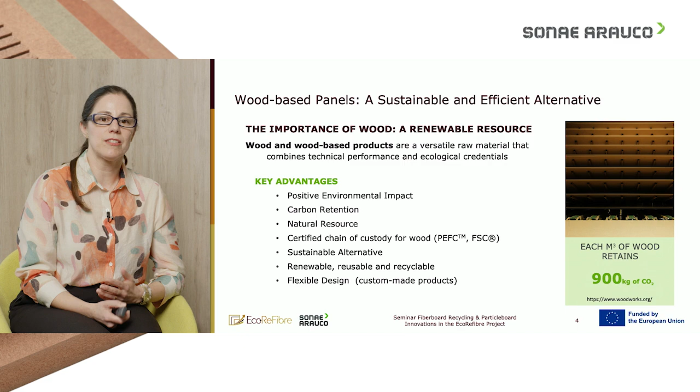Also, an economy based on wood exploitation and forest exploitation means that we need to use certified chain of custody wood, meaning that the wood is regulated and we don't compromise the ecological balance, and also we will always have material available and will not compromise future generations. And this is the most important principle of circular economy. Wood is a sustainable alternative to other fossil-based materials. It's renewable, it's reusable, it's recyclable, so all aligned with circular economy. And particularly for engineered wood products, we can easily tune the products to have different dimensions, different properties. So this flexibility in design turns this type of products very, very attractive to be explored.

And forests play a crucial role in mitigating climate change by acting as carbon sinks. And each year, the European forests retain 806 million tons of carbon dioxide, which is equivalent to 20% of the European Union fossil fuel emissions. So, in addition to this capacity for absorbing CO2, forests also help regulate the climate, protect against natural disasters, and are also vital to maintain biodiversity. So here we can see the importance of the forests and of a bioeconomy based on forest exploitation.

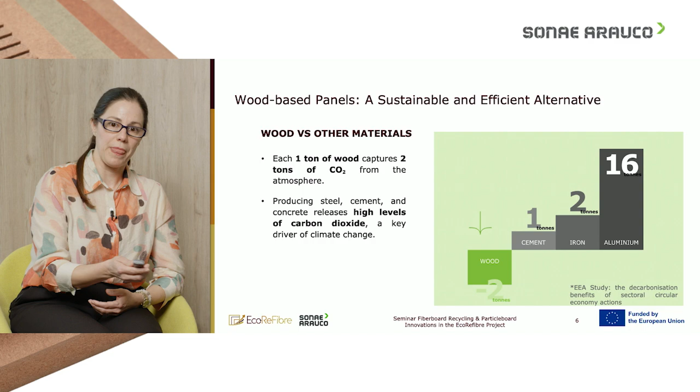Yeah. And as Ines was explaining, wood versus the other materials, so this benefit that wood can bring to our planet is not only this carbon sink, but also this positive impact compared to other products used in the market, like cement or iron or aluminium.

So not only does wood not have emissions in production, making the wood-based panel has a positive impact; it can capture the CO2 also from the other materials. So it also brings this positive impact to our planet, acting like a carbon sink for the CO2.

And it can also bring other advantages when we speak about wood and the circular economy, and that is the main focus that brings us to these projects, that is closing the loop. It's something very important to our industry, not having the products ending with the consumer, and really closing the loop and bringing second life to the products. The reuse and recycling of wood-based products is very important for the planet, it's very important for our industry.

It's the way we have to extend the product life and to bring these benefits for the longest time possible, having the minimum waste of the wood-based products. This also links to the way the products are designed. So eco-design also plays an important role in this step. Even for the recycling of the products, eco-design is very important in the way we can then treat the products and sort out the materials to the recycling centers. So eco-design is also very important.

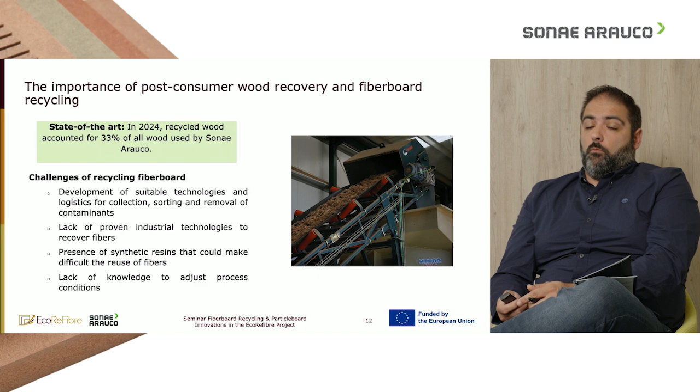And why is this needed? Well, at this time, the production of MDF is increasing. It's a good sign; wood-based products have higher demand at this moment. But that also brings more material being wasted. So we need to recover this MDF that is being discarded to landfills and energy recovery, put it into new products, and try to extend this life cycle. So sorting and recycling technologies for MDF are very important and very needed for our industry.

And André, that is why the project EcoReFibre was born, because, through the figures that you showed us today, fiberboard post-consumer waste is growing exponentially, and there is still a lack of industrially proven technologies to recycle fiberboard back into fibers to be incorporated into the same or similar products, maintaining the value of the fibers. Not using it for energy. Of course, as you said, we need to produce energy, but it's important to keep the carbon retained and maintain the value of the fibers.

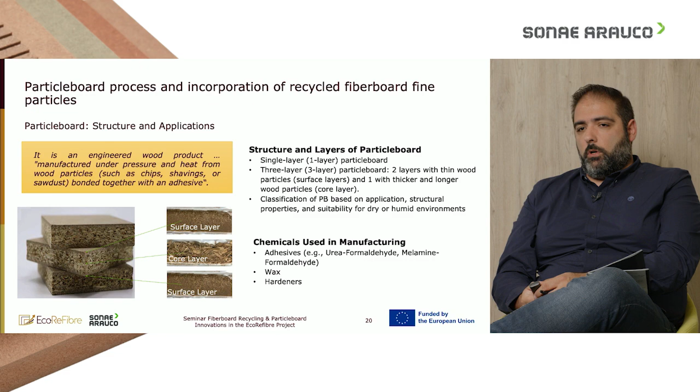Particleboards can be classified in Europe as P1, P2 until P7, the standard from the European Union. And these can change depending on the type of wood that we use, type of particles, and also the formulation that we have in the process. To make this product with wood, we use adhesives, normally urea formaldehyde resins or melamine urea formaldehyde resins, depending on the type of application, emulsions, and hardeners in the formulation, gluing the particles together. The change and the mixture between all of these can give different properties on the finished product, depending on the application that we need to focus on.

And this because particleboards can be used in the furniture that we have in our houses, like cabinets or shelves or our beds or tables. For interior design, wall panelings and decorative uses for construction or industry applications, but also for decorative panels. When we put paper or foil faces on both faces of the particleboard, we can use different types of decors and finishings with veneers or laminates or even lacquer.

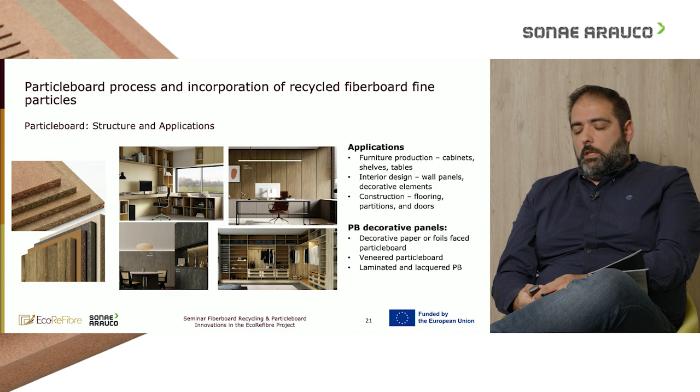So these different applications will lead us to different ways we need to produce the particleboard, and in production, with the different processes that can influence the board, we can have different properties. And how is the particleboard made? We start with the raw material.

And this is a very important step for our products, because it is when we guarantee that we have quality raw material, that we guarantee the quality of our finished boards. It's like cooking at our houses. If we use good ingredients, for sure we can have a good dish at the end. In our products it's the same. So this control of the raw material is very important.

When we use recycled material, the importance is even higher because the variability that we can have in the raw material is higher. So this control, guaranteeing that we only pass wood into the process, is a very important step when we use recycled material. The sorting and cleaning of the wood that we receive from our collection centers is very important to guarantee that it is in perfect condition.

After having this sorting guaranteed and controlled, we move on to the drying and classification of these particles. As I explained before, the particle board can be produced with thin particles and thicker particles, so we need to segregate them and separate them to different parts of the process. This is a very important process to have the characterization of the product at the end.

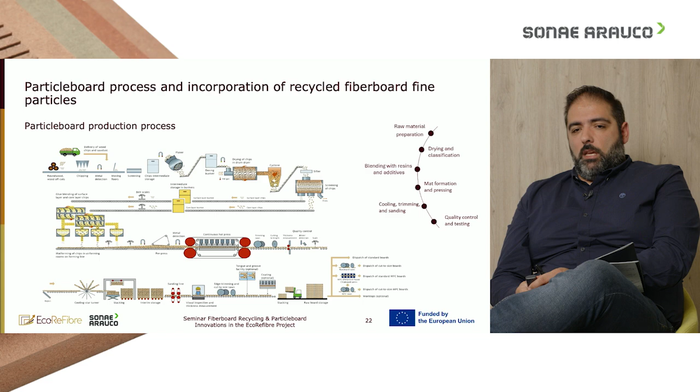After this, we can control some properties of the product, but very few, more related to the surface, appearance and dimension. So we cut the product. We can have different finishings on the surface, different sandings depending on the application of the product. Then there's the packaging and expedition, and our quality control to guarantee that everything we have done in the process was in accordance with what was intended.

And to address one question, the shortage of sawdust. Typically, nowadays sawdust is used in the surface layer to improve surface properties, but due to fluctuations in price and sometimes shortage of this raw material, it's important to find other alternatives that could bring the same benefit as sawdust. So therefore, in this work, the expected benefit of introducing these fines.

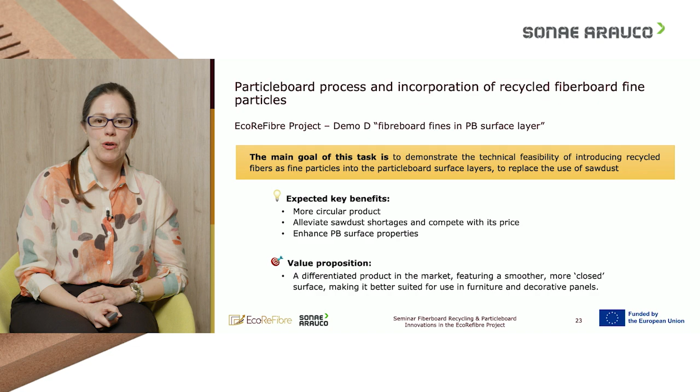And how are these fines produced? They are produced by innovative technology that is being developed by Diefenbacher. So the post-consumer fiberboards are collected, chipped, cleaned, sorted, in order to have a rich fraction of fiberboard chips, and then through innovative technology that we call a dry impact reactor, which is a dry process, the fiberboard chips are converted into fine particles.

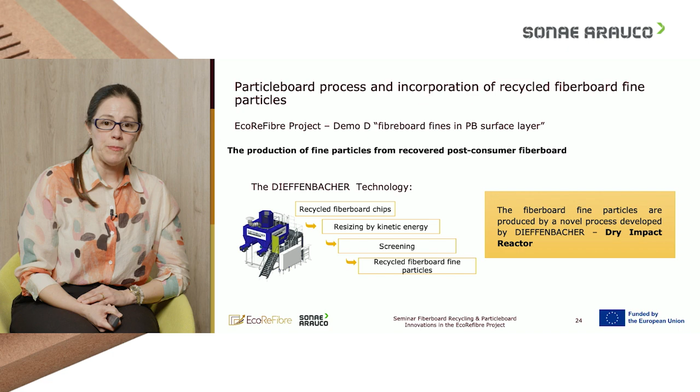And these fine particles are afterwards screened in order to obtain a homogeneous distribution of particles, and this will help us to control the process in the next steps. And so we take these particles to be incorporated into particle board. But first, one of the first things that we did in the lab was to conduct a granulometric distribution of the fines that we were producing and compare it with our typical industrial surface layer particles and also sawdust.

So in the graphic you can see in orange and green two of the batches that were produced by Diefenbacher's technology, so two different batches of fines. And in gray and in black we can see our comparison sources, which are the surface layer particles and sawdust. And the main observation that pops out from this evaluation is that the recycled fine particles that we are producing in the project have a considerable amount of particles below 0.5 millimeters, so very small particles.

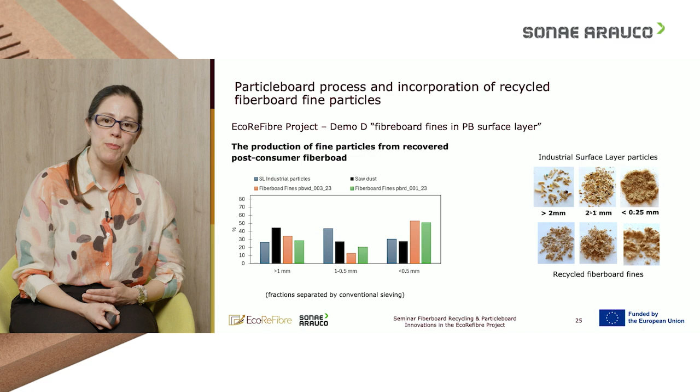And also on the right side, we are displaying the typical industrial surface layer particles that we have in particleboard, and below we have the recycled fiberboard fines that we are producing. So we can visually see that the particles that we are producing have a granulometric aspect and also geometry different from the typical particles that we employ industrially.

So we took these fines and produced particle boards in the lab, 3-layer particle boards. We maintained the core layer standards, and we only replaced 10, 20 or 30% of the surface layer industrial particles by these fines. So we did not add these fines on top of the surface layer. We removed 10, 20 and 30% of the surface layer industrial particles and replaced them by the fine particles produced in the project. And then we blend the particles, glue with our standard recipe and produce the laboratory panels.

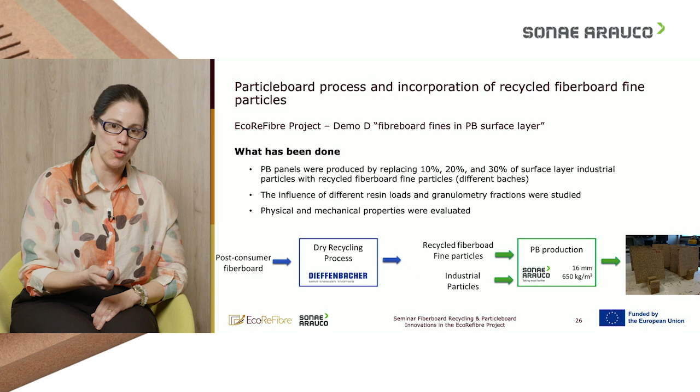In the lab, we studied the influence of the resin load, and also played a little bit with different granulometric fractions to evaluate the effects. For all boards produced, we evaluated physical and mechanical properties to understand the main outcomes of the incorporation of these fines into particle board. And so here first we present the results regarding internal bond at the left, and at the right the thickness swelling of the particle boards produced. We always produced a reference with no fines, 0% incorporation of recycled fines, and then we have the incorporation of 10, 20 and 30% recycled fines.

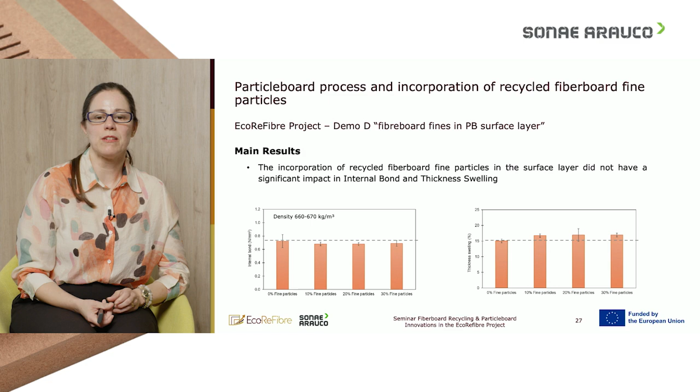And the main conclusion of these two parameters is that we did not see a significant impact in the internal bond and in the thickness swelling. Of course, we did not change the core layer, which is usually mainly responsible for the internal bond property. But since we were changing the surface layer, sometimes changes in the surface layer can affect the density profile and indirectly affect internal bond. But here what we observe is that neither internal bond nor thickness swelling were significantly affected, which was a good outcome.

Then we analyzed our panels regarding bending strength. And surprisingly, we saw that for incorporation rates of 30%, we had a great improvement in bending strength, which was a very interesting result to see. At the right, we are displaying our results regarding surface soundness of the panels produced, in raw particle board or surfaced. And regarding surface soundness, we did not see a significant impact in this property.

In this case, we can say that no difference is also a good result, because we are already incorporating 30% of recycled fiber fines, so it's already a good impact, and we can see also in the bending strength that incorporating 30% of recycled fines, we can have better behavior. So it's a double win. We incorporate recycled material and really improve the properties of the product. Having no impact is already good, but having improvement is much better, no?

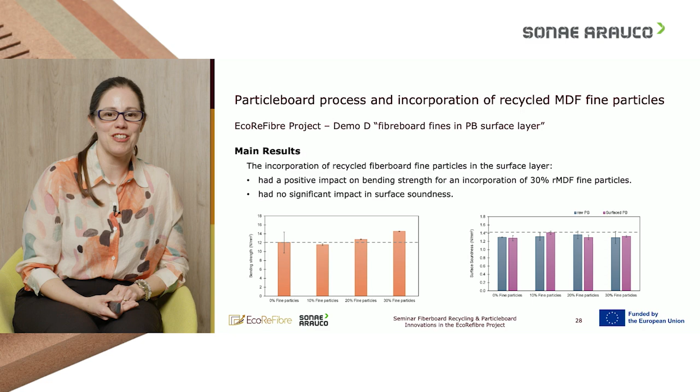Yeah. So you're right, André. Although we were expecting to see something in surface soundness, this is a positive result, with the additional advantage of improving the bending strength. Yeah, definitely.

And then we also analyzed our laboratorial boards regarding surface roughness. This property was very challenging to evaluate in the lab, particularly for the incorporation of 30% recycled fines, where we can see that we have a wide dispersion of the results. So it looks like the boards that we are producing confer a very heterogeneous roughness.

Maybe since we are making the panels in the lab, they are handmade, we might not have been distributing these fines well into the surface layer. So it could be one of the reasons explaining this variation in the results. That's something that will also be important to evaluate in our industrial trials, because the equipment will be different, and we have ways to guarantee that the particles we are incorporating in the product are well distributed.

So in this sense, it will be very different from what we can do at lab scale for sure, and also the outcome for sure will be different. No? Yeah, we really hope so. We really hope, and that's why the industrial trials will be important, because in the lab it's very difficult to evaluate surface soundness and roughness. Sure. So you really need to go to industrial trials and see if, with our typical industrial setting, we can have a more homogeneous surface and see the real benefits of

introducing the recycled fines. But also in the lab we conducted cutting performance studies, and in the right graphic we are displaying the edge quality analysis of cutting performance, where we can see that the incorporation of these recycled fines has improved the edge quality of the boards produced. This means that with the introduction of these fine particles, operations like milling, drilling, and cutting will be improved for sure. At least that was what we observed in the lab.

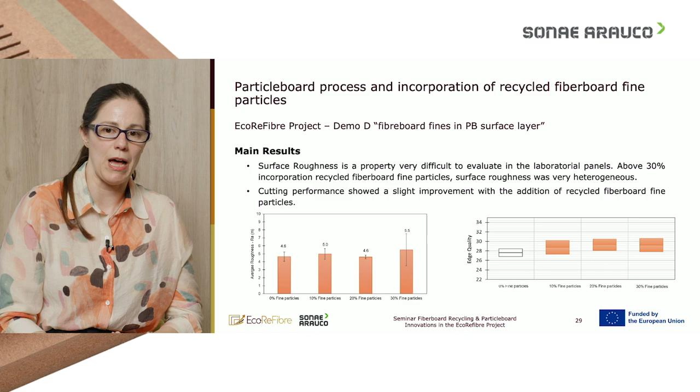So, as the main outcomes of this project, we successfully demonstrated that we can incorporate these recycled fiber fine particles, and they can be reused in particle board without compromising at least the physical mechanical properties. Another thing that we saw, but not shown in the slides before, is that we don't need to change the gluing recipe. So we can incorporate these recycled fines and still maintain our typical gluing recipe to produce the panels, which was also a good outcome.

But also interesting to see, although we did not see it in the surface soundness or roughness measurements, the truth is that when we take the panels and observe them closely, we observe that the fine particles are covering the particle board surface very well. So this for sure is improving the surface layer of the particle board.

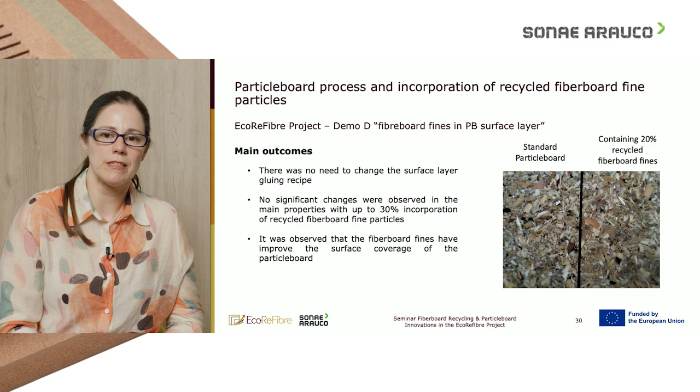But there are some things that we cannot simply measure in the lab, like the behavior of these fine particles that we are producing in the project, which you can see in the picture presented, in an industrial process, in steps like sieving or during mat formation. Mat formation is a dynamic process. So how will these fines behave in real industrial processing? Again, this leads us to the answer that we really need to go to industrial trials, but of course some stages of our industrial process will be of concern.

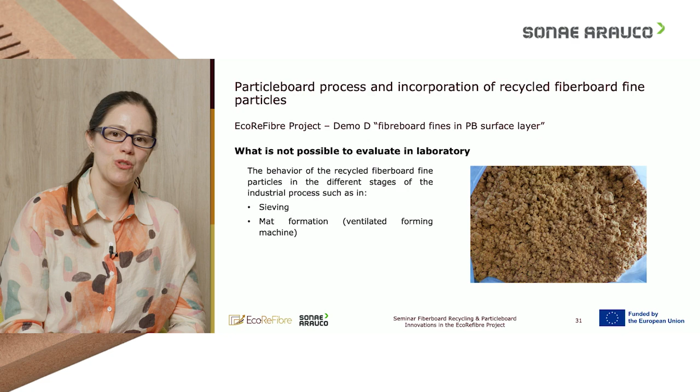So as upcoming actions, we are already discussing the industrial trials with the plants, in order to demonstrate the industrial feasibility and scale-up of the technology that we are developing here for the particle board. And of course we will conduct a deep characterization of the boards produced, particularly in surface quality, in order to check and prove that we can have improvements with the incorporation of this type of particles, because the intention is to produce a differentiated product.

And in the end, money is always important for the company, so we also have to conduct an economic assessment, and the technology has to be scalable and easily integrated into our process. So we will be analyzing the feasibility and combination of technical, economic, and sustainability aspects to determine the possibility of implementing this in the future.

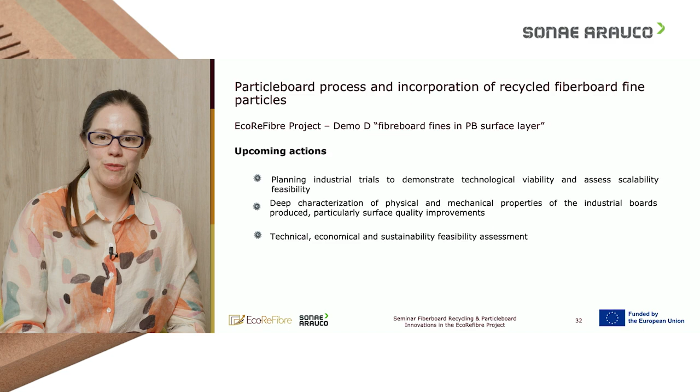And to wrap up this webinar, we conducted a kind of SWOT analysis and identified strengths, weaknesses, opportunities, and threats for this particular task of the EcoReFibre project. The most important strength that we identified is that we are doing something truly innovative that could actually enhance the surface quality of the particle board. This is the main strength of the approach that we are studying. But on the other hand, there are weaknesses that we need to address.

So the technology that is being developed by Dieffenbacher requires initial investment, and so we really need to assess this and carefully plan and verify if we can have an economically viable solution with the implementation of this technology. And also, we still don't know what type of adaptations we have to make to our industrial process in order to incorporate these recycled fiberboard fine particles into our process.

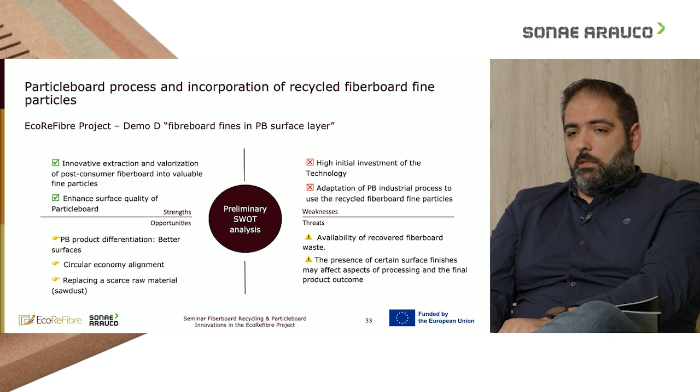Yeah, and definitely, although we have these challenges and weaknesses to address, the potential and the opportunities that we foresee for this task in the EcoReFibre project are exciting. So let's see in the industrial trials how we will come out. The industrial trials will turn this concept into reality, and we are really looking forward to testing it at a higher scale.